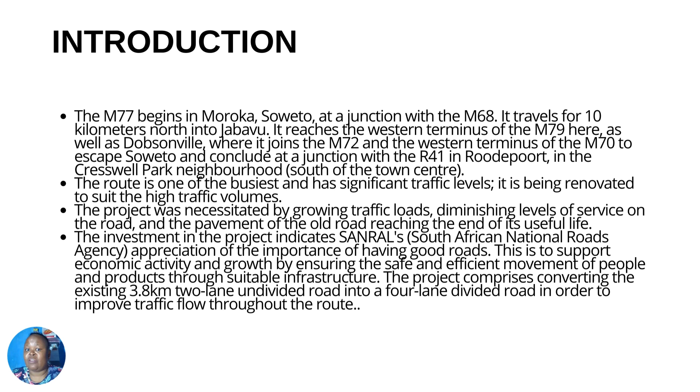The investment in the project indicates SANRAL's appreciation of the importance of having good roads. This is also to support economic activity and growth by ensuring the safe and efficient movement of people and products through suitable infrastructure. The project comprises converting the existing 3.8 kilometer 2-lane undivided road into a 4-lane divided road in order to improve traffic flow throughout the route.

Now, my next slide addresses the estimated present traffic. A traffic study was conducted before from the information that was obtained from the municipality, which assisted in the design of the existing pavement structure. Based on an average daily traffic of 1,200 vehicles per day and an analysis period of 20 years, the recommended class for this particular road is ES3.

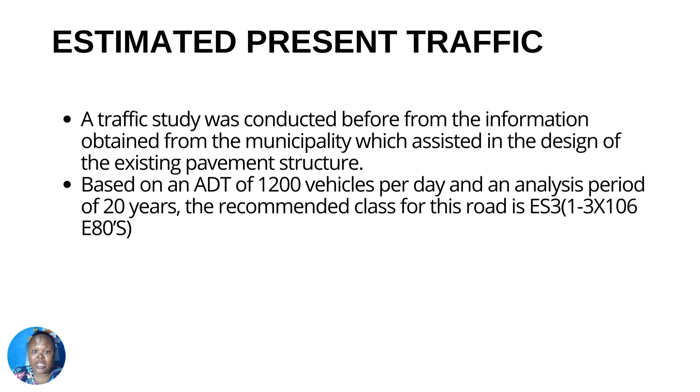Now, the next slide talks about the design standards or guidelines that were used during the compilation of this report. The generally accepted documentation standards such as the South African National Standards, G2 Design Manual, TRH4, TRH17, SANRAL Manual, and UTG1 are adopted to perform road design. Geometric design projects for highways, an introduction by John G. Schoon.

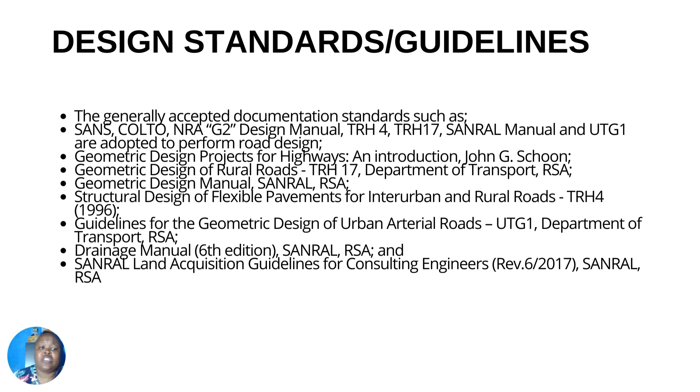Geometric design of rural roads, TRH17 by the Department of Transport, South Africa. The Geometric Design Manual, SANRAL, by the Republic of South Africa. The Structural Design of Flexible Pavements for Interurban and Rural Roads, TRH4 of 1996. Guidelines for the Geometric Design of Urban Arterial Roads, UTG1, by the Department of Transport, South Africa. The Drainage Manual, 6th edition, SANRAL, South Africa. And lastly, the SANRAL Land Acquisition Guidelines for Consulting Engineers, Revision 6 of 2017 by SANRAL, South Africa.

Now, moving to the brief overview of the adopted geometric design software. For this particular project, I adopted RoadMate for the geometric design. The comprehensive suite provides integrated civil infrastructure design, analysis, and documentation functionality, including advanced industry drawing file compatibility. The software allows for DTM creation and manipulation, advanced survey calculations, bulk earthworks, roads, pipe design and analysis functionality for sewer, storm and water networks, quantity generation, production drawing generation, 2D or 3D CAD, realistic model, rendered video creation,

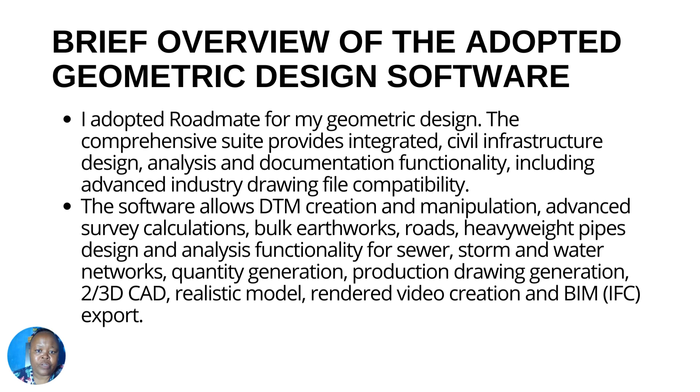and BIM export. Now moving to the pavement design calculations. The number of vehicles per lane per day is 1,200, and the road category for this particular road is category B. The equivalent design traffic was calculated to 1,627,632 E80s. Therefore, the needed bearing capacity of pavement is between 1 and 3 million standard axles.

The pavement class is ES3, and for single axle load, the load is 76 kilonewtons, and the relative damage exponent n is equal to 4. So therefore, ADE was calculated to 978 cumulative E80s to 11 million. The geometric capacity was found to be 1,727.2. Sorry.

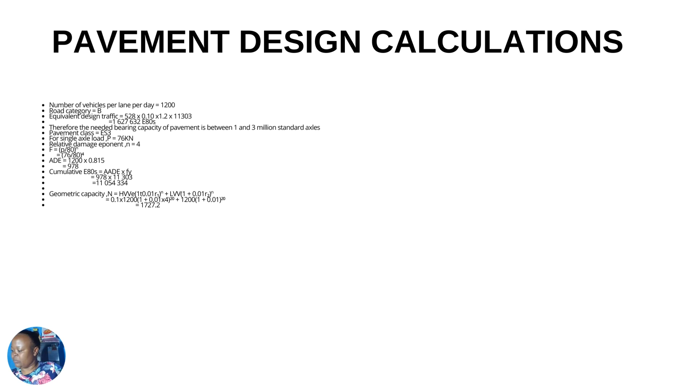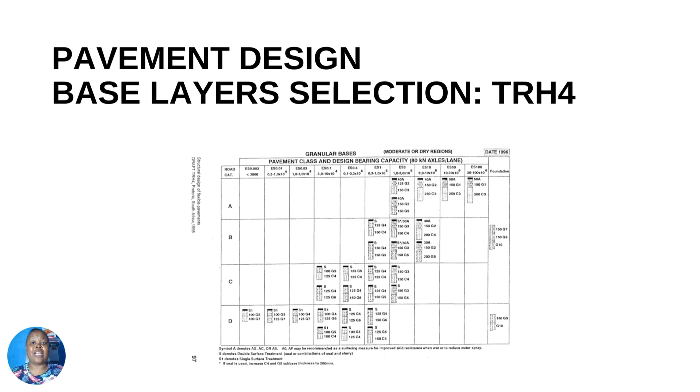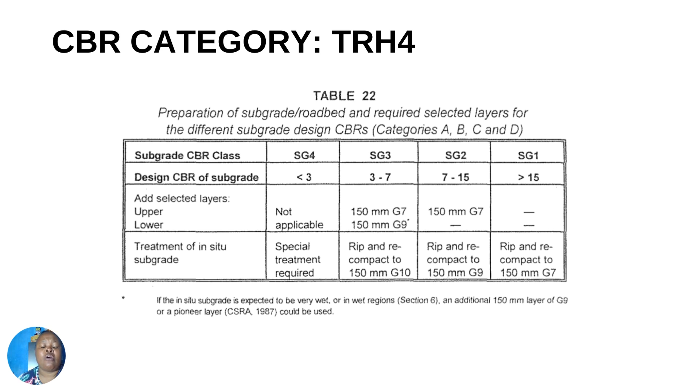Now, moving to my next slide, the pavement design base layer selection. The base layer selection was done with guidance of TRH4, and also the CBR category was as per table 22 of TRH4. Now for the subgrade selection also, I referred to TRH4.

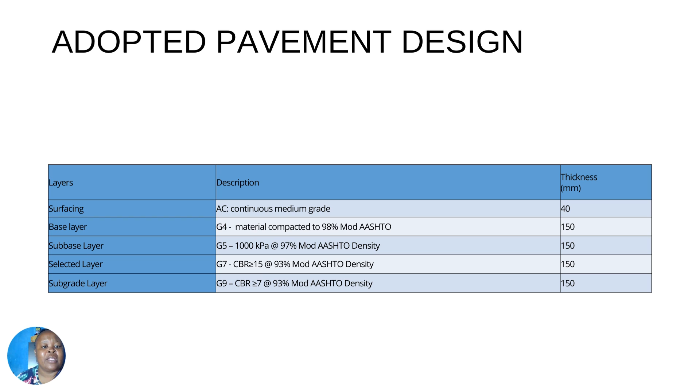Now for the adopted pavement design, the different layers of the road: the surfacing is continuous medium grade of 40 millimeter thickness, the base layer of 150 millimeters, the sub-base layer at 1000 kilopascals at 97% mod AASHTO density, also at 150 millimeters thickness. The selected layer also 150 millimeters, subgrade layer also 150 millimeters.

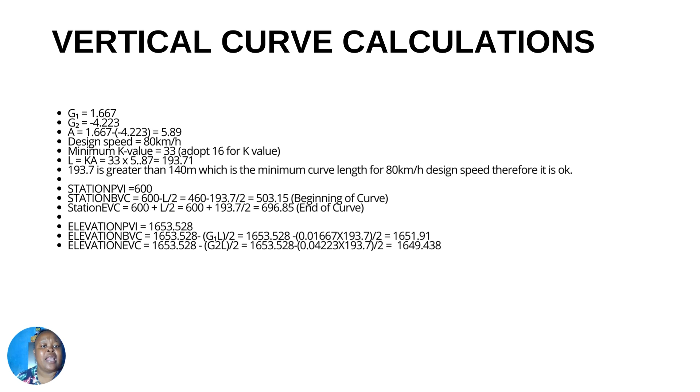Now the next slide addresses the vertical curve calculations. The design speed of this particular road was 80 kilometers per hour. So therefore the minimum K value is 33, adopt 16 for the K value. The length of the curve was calculated to be 193.71, and 193.7 is greater than 140 meters, which is the minimum curve length for an 80 kilometers per hour design speed. Therefore, it is okay. Now, this allows for the calculation of the beginning of the vertical curve, the end of the vertical curve, the elevation of the PVI, the elevation of the BVC, and the elevation of the EVC.